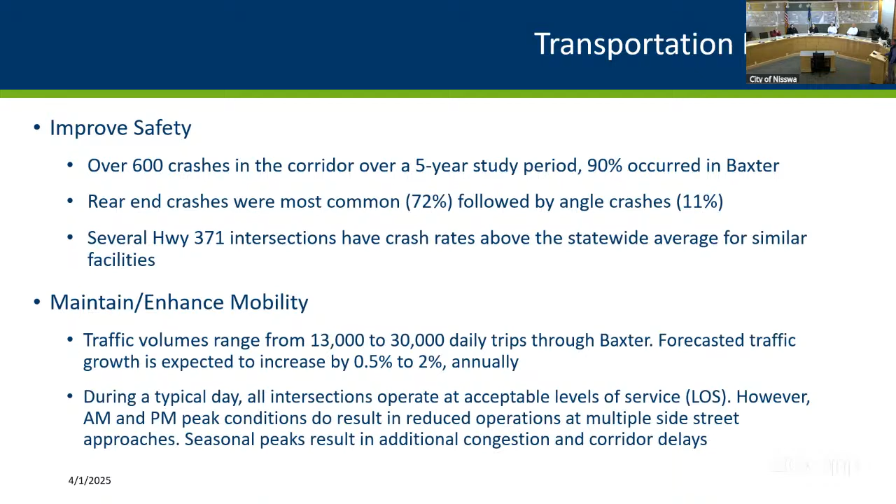But we wanted to make sure that anything that gets looked at for improvements keeps mobility as a primary need out there as well, that we don't want to sacrifice our mobility just to make all the safety improvements. So we're keeping those equally in our thoughts to make sure that we have both a safe and an efficient corridor. The next slide.

Some of our engagement to date: again, I mentioned we had three phases. We're in the final phase, and I do believe those updates to the website are occurring right now.

The goal was to have them done basically before the start of April, and we're right there now. So if it's not out there, it's going to be out there in the next day or 2. And then we're doing our final kind of workshops with all of our project partners. And so we previously met with Baxter a couple of weeks ago, as well as Crow Wing County met with their board, and then here tonight being able to share some of this information with you all.

And then wanted to share just a couple of what you're going to find out on that website. So these are 1-pagers that we've put together for kind of each of the locations, and these are even above and beyond what was submitted in the RAISE grant. The RAISE grant was really what we thought were kind of those more near-term immediate. I think there were 15 locations that were looked at and submitted for the RAISE grant.

We actually have more around 18 to 20 true locations, and one of those being here in Nisswa out at 13 and 77. We have an option there. But we weren't putting that forward in the RAISE grant at this time, just because there was still some question about what that concept looked like, and we'll share that with you all in a little bit. But this is just an example of what the public will find when you visit the website.

It kind of provides the study background, what the existing condition is at the certain location, and then what the proposed improvement is. And it's really tough when we're talking about pretty technical information here and trying to provide it in a manner that really the public can consume it.

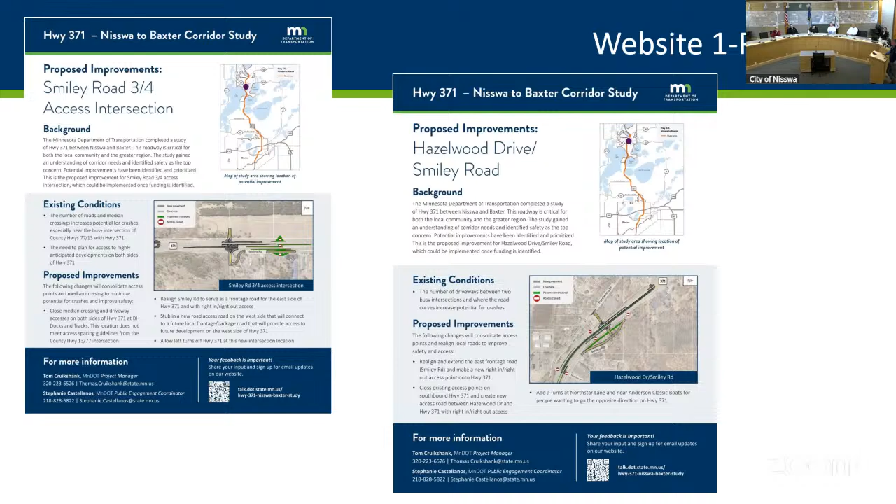So, the little bit of text here and the little graphic, we hope that people really dive in and look at some of the other resources that are out there too, because it's hard to tell a story of 18 months of what we've looked at in some of these one pagers, but there's more information on the website as well. So next one.

So what we did look at throughout the process, and again, we've shared some of these with you, and we've had the roll plot out and all that, but we looked at alternative intersection controls, looked at J-turns or reduced conflict intersections. We looked at some left in, left out or green T intersections, and also some grade separation at a few locations. In addition, we looked at areas where we might be able to do some further access management.

We know that wherever we have access points on the corridor, they are points of conflict. And the fewer points of conflict we have, the safer corridor we can have. Now, we recognize that we can't go and eliminate all access. That just wouldn't be reasonable or feasible to maintain land use and let people get to their destinations throughout the entire corridor.

And then we also looked at a number of locations where the existing or future frontage backage road system could be enhanced to provide, again, better access for the public. So maybe if you only have a short trip that you're moving north and south, maybe you don't even have to get on Highway 371.

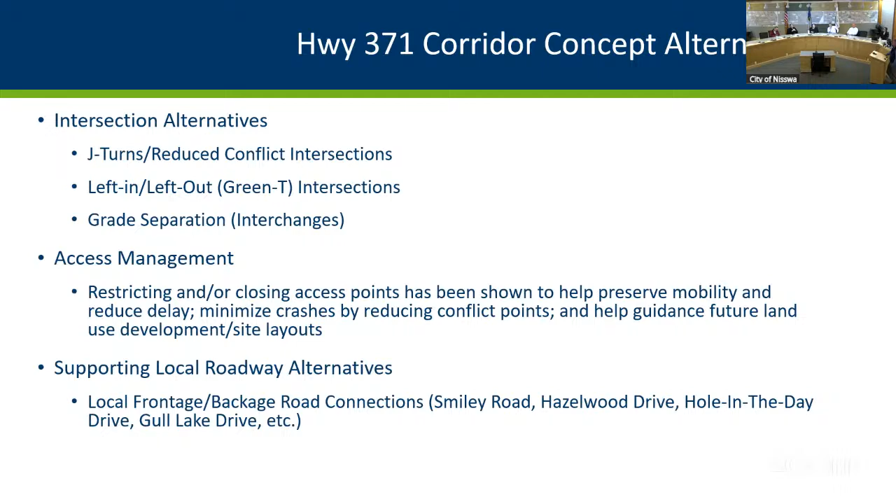Maybe there's a local supporting roadway that can satisfy your trip, and making some of those connections can really create that opportunity to provide, again, a safer option on 371 for those people that are more regionally traveling, and a safer option for those on a local system that are trying to just get to local locations.

And so we did mention that RCUTs or J-turns are something that we are looking at. I know that it's not new to this area. There have been 4 that have been recently constructed along the corridor within the Brainerd International Raceway location. But some people say, what is this new J-turn?

And while they are relatively new, they have been around for some years, and there are quite a number of them throughout the state that are being implemented. And so this was a resource pulled off of MnDOT's site, and I'm sure this is actually dated now. They're well over, I think, 75, and I think in another year or two, that number is going to more than double.

So this is a traffic control and safety improvement tool that they're finding to be highly effective. And so it's being implemented more often. And I think as the public sees them and gets acquainted with them, there's going to be less concern or resistance to them.

I kind of equate it to roundabouts. If you go back 12, 15 years ago, and people thought of roundabouts, the vast majority of people opposed them. They really just said, oh, I hate those things. They're so confusing. They're worse than anything.

And nowadays we continually have people say, why aren't you putting in a roundabout? Why are you putting in more stop signs? Or why are you putting in more signals? I hate sitting at a red light when there's no one on the cross street. If I could just go through it with a roundabout, I'd be happy.

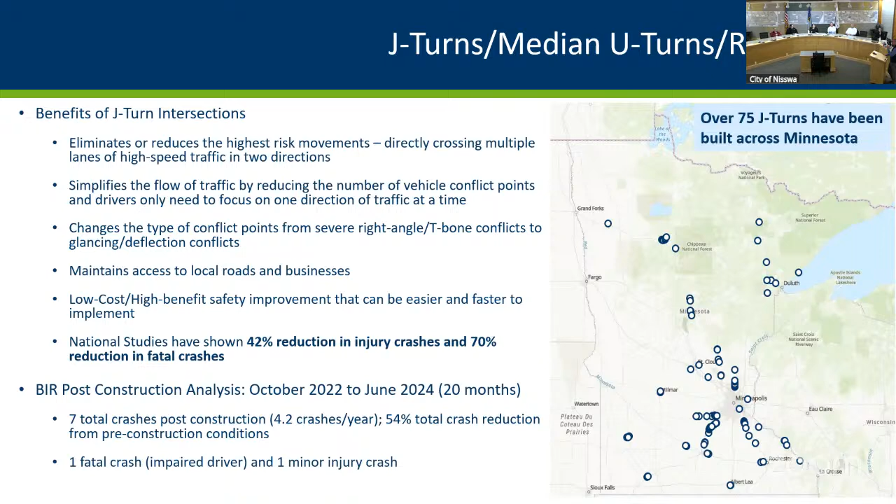So we wanted to provide a little bit of information on signalized J-turns as well. And so this is something that in Minnesota is relatively even more new. There's only one signalized J-turn in the state right now, up on Highway 65 in Anoka County. It's a location where they at one point looked at building an interchange, but due to some site constraints, cost constraints and everything else, they put in a signalized J-turn.

And originally it had some challenges, it had some tweaks that had to be made. They had free right turns where you could turn on red. If you were on the side street, you could make a right turn on red. They've had to eliminate that because really the sight line was not ideal for the high speed section that it is located in. They had trips on Highway 65 that are traveling at very high rates of speed.

I think in that location it's signed at least 60 or 65. And so they've actually changed it over to a no right turn on red. And they feel like they've really improved the safety even more.

And as Tom alluded to, it's really the intent of all J-turn or reduced conflict intersections to remove those most serious conflicts, those right angle crashes where someone's trying to make a left turn or a straight across movement, and they're exposing themselves to a right angle crash where that driver gets T-boned.

And so when you create intersections like we're talking about here with J-turns or signalized J-turns, those movements become more of a deflecting or a glancing type of blow, because someone is taking a right turn, and if they were to get hit, it's not that straight on right angle.

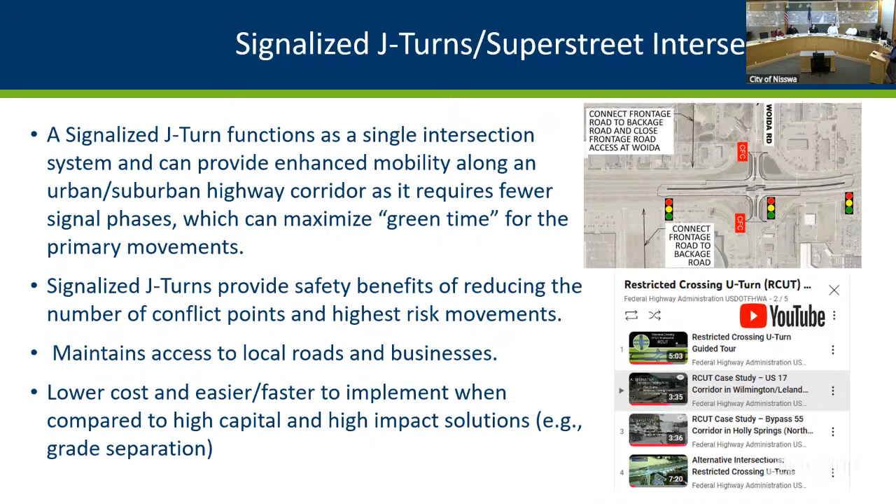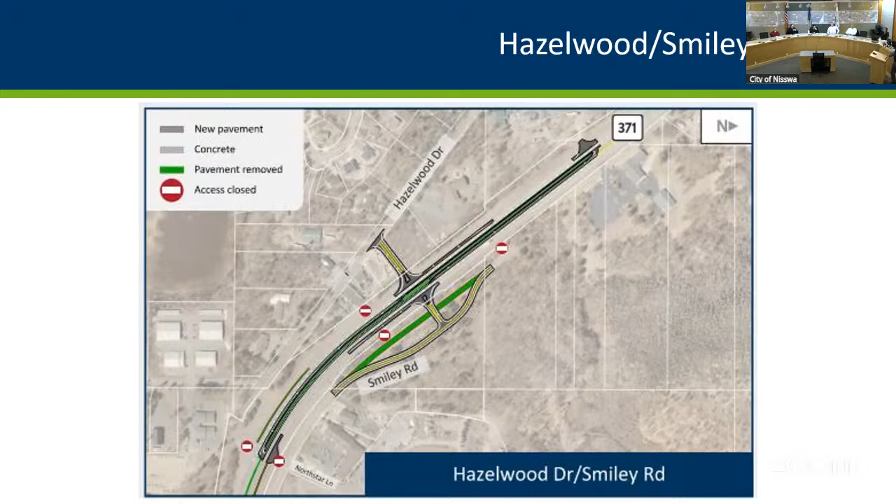The next one is one that was not included in our RAISE grant. We see this as a location we're monitoring a little bit more, given the safety conditions we've more recently experienced. We didn't see it in the previous 10 years of our safety analysis, but this location just recently has had those 2 really unfortunate crashes with fatalities. So while there have been some incidents, when we started the study we weren't looking at this as needing major improvements, but this is an option here to put in a signalized J-turn at this location.

What really gets difficult is the frontage roads, mainly on the east side of where they're located. Is there an opportunity to remove them where they're at today, maybe shift them further to the east to get better separation from the main line? Because that's a problem today where sometimes those queues back up and really restrict people from using that continuous frontage road. And so that would be an option, to maybe improve some of the local system with this, but really we would put in a J-turn here.

We would allow left turns at this location. There are different designs even within J-turns and signalized J-turns of what kind of access you do allow. Sometimes they're just right in, right out. In areas where you have a much higher left turning movement throughout many hours of the day, you can look at putting in the full left turns.

And like the one I described in Anoka County on Highway 65, we call it a 3/4 J-turn, where you can make the left turns off the highway. But if you're on the side street, you cannot make a left turn on or cross straight over. That is where you have to do the median U-turns. So this one, you can't go straight across? You cannot go straight across, no.

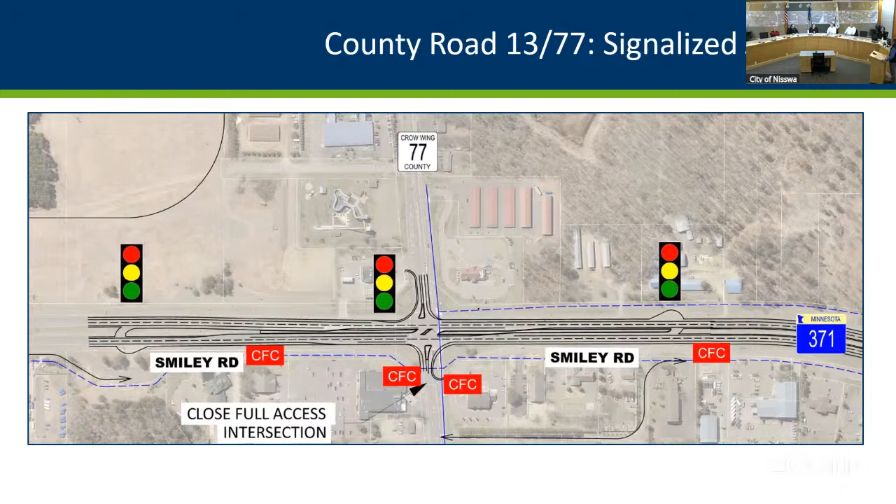Other questions on this one? We've got a few more we want to share, but other questions here? All right, we'll continue a little south.

And so we've recommended that we shift that access location a little bit further to the south. This extends Smiley on the east side, and then would tie into some type of a city street on the west side that would accommodate future development. This again would be designed as an unsignalized 3/4 access type of intersection. Understand that there's been some development interest in this location. We did have this in the RAISE grant to be more of a short-term type of improvement. But that might even need to happen sooner, depending on what happens with development in this area.

And so we've been talking with staff a lot that, hey, when you get someone walking in the door and they start showing site plans, bring MnDOT into that conversation early, because this isn't just something that we can go out and get developed in a couple of months, which some of those developments want and expect to happen. So the sooner that everyone can see a concept, understand a concept, and build that into their site plans. That's really what some of these improvements are being designed for, to advise future development in the area. Yeah.

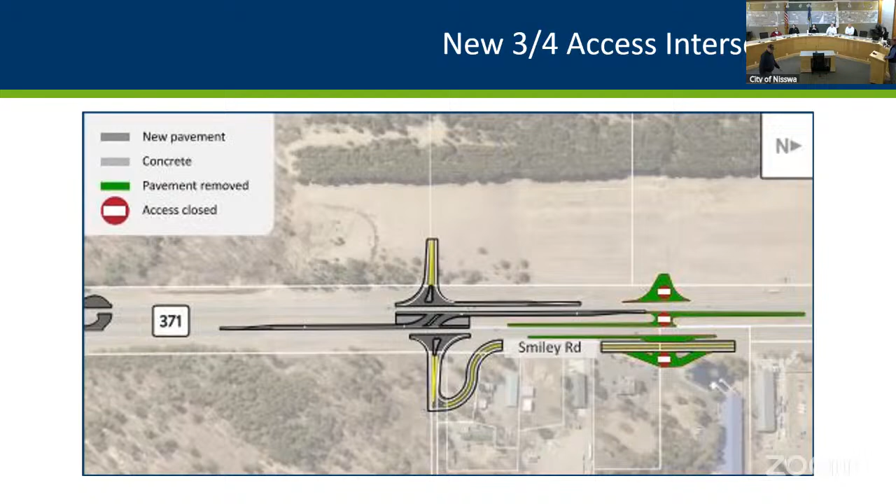This is where you have utilities planned to go underneath? I know that. Well, that was the original plan, but weren't they talking about leaving the lift station up in front of the brewery and stuff now, punching across there? That was, yeah. It is what it is. It is what it is.

This was another one that was included in the RAISE grant, and again, no immediate need at this location. This was not a location where we had a lot of safety issues. But it's an opportunity that if funding were available, this would be one that MnDOT would look to implement to improve safety. But if funding were not available, this is not going to be your high priority location for improvements in the more near term. That would probably get pushed a little bit.

This concept could be modified. Yeah, any of the J-turns could be modified to allow those left turns like the 3/4. It's really based on what is the left turning need. Again, we know the church probably has a peak, right? There's probably a time when there's 100 cars or 200 cars or whatever the number might be in a shorter time period, but that's probably not sustained throughout every day of the week and several hours of every day.

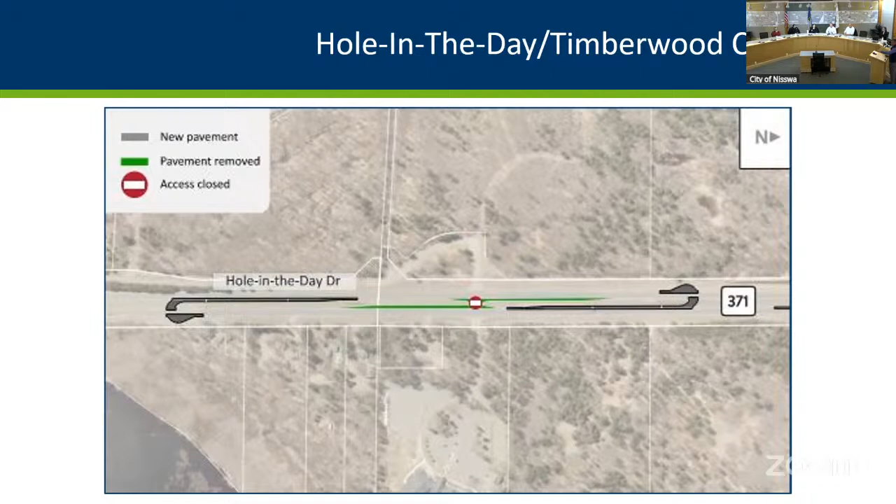I've been warned, I got like 5 minutes because you guys have a planning commission. So I got a couple more.

The other option we have in the next slide is what I referred to earlier when we said that we had a left in, left out, advance one. Oh, yeah, I did get it working here. So this is a left in, left out, or a green T type of intersection where, again, if you're say southbound and you wanted to turn onto Nashway, there would be a designated left turn lane. And so you could take a left in. This actually allows a left out as well.

And the reason why we are considering that here is just, again, the distance people would have had to travel with the J-turn. We're not saying that one's not still on the table, but this is just an alternative option for that. And by eliminating that west leg, it really eliminates the worst kind of condition that we've had out here with people trying to cross over in this location. So we do have two options that are moving forward at this location.

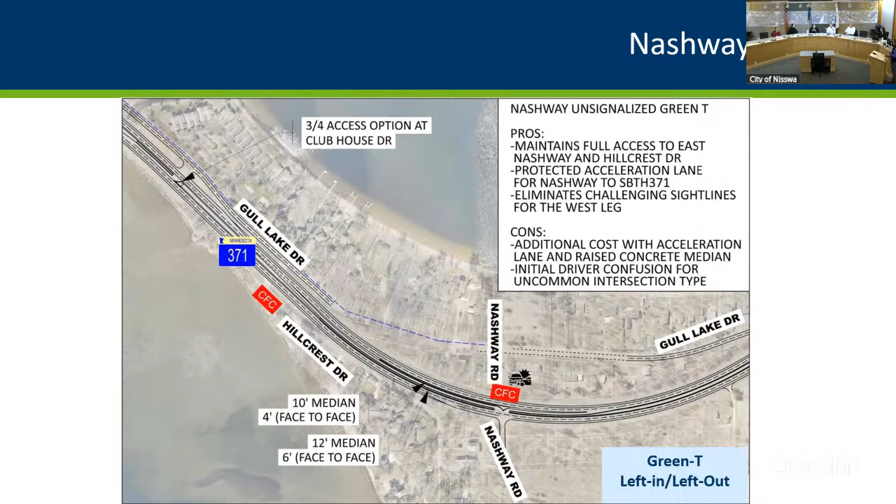Are you all still intending to have the proposed paving and creation of the service drive alongside 371 in that narrow spot on Gull Lake and Hole in the Day Lake? So that's back to this one. I think that's kind of our long-term goal, to have that continuous western frontage road where Hole in the Day would connect to Gull Lake Drive. That requires a much bigger investment because it actually includes moving the lanes on 371 as well a little bit to the east.

And we know that that is challenging in itself. There's some environmental constraints out there with the wetlands and Hole in the Day Lake and all of that. You know, again, we're identifying that as kind of that long range goal, and that in itself would be a fairly large investment. So again, that was not in the RAISE grant to do all that work. Sure.

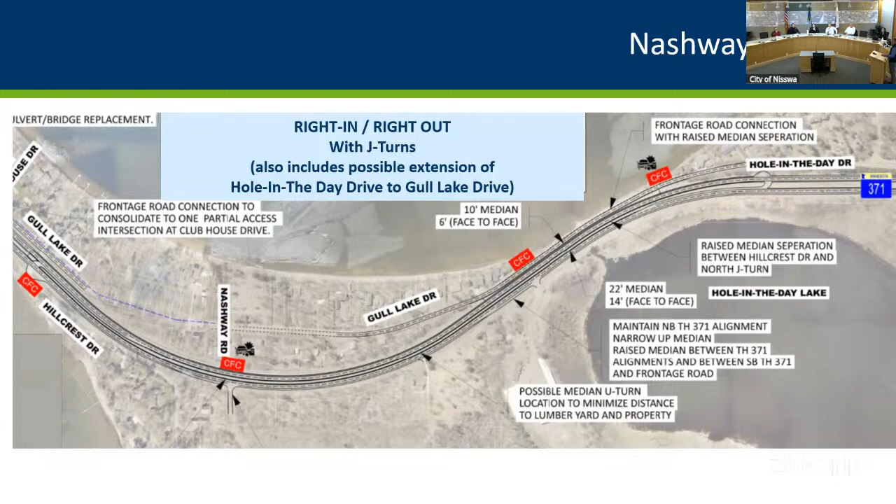And so here, again, we have a median U-turn for the southbound and the northbound direction. A slight difference on this one is, as you see on the northern end there, it's not only just a J-turn median U-turn, but it actually would be a left turn into the service road in that location. So that's kind of how we're treating many of these.

This again would be one that we would look at doing hopefully sooner than later. This is in our more near-term improvements that, if the grant funding were to come through, we would try to advance. And so that's the concepts. Again, we've got roughly 18 throughout the entire corridor, but these are the ones we wanted to just present to you all tonight.

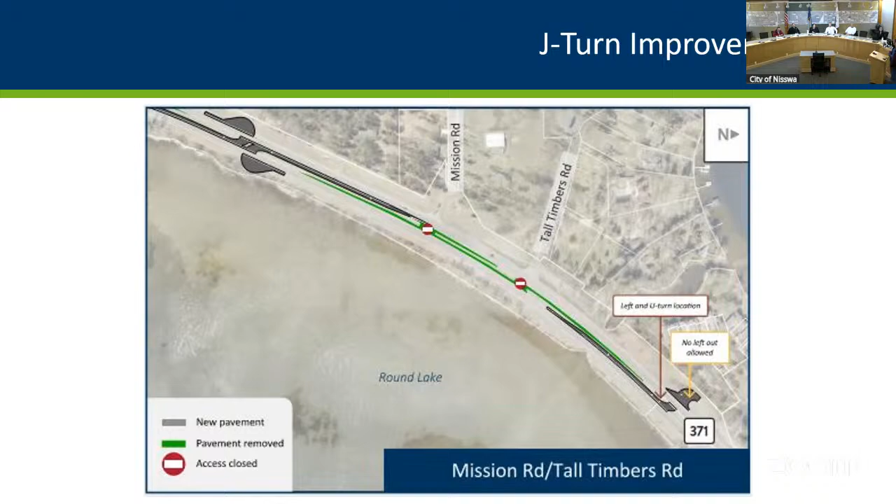Other questions? Feedback? What is the next step? Our next step is, again, we've been working with staff on developing our implementation plan. And so we've broken things down into near term, midterm, long term. And just generally those buckets are the near term being in the next 5 to 7, 8 years. Midterm would be somewhere 2035 or later.

And then long term, like we've got an interchange at Highland Scenic down on the very south end of our corridor that might be a 30+ year type of thing, because we just know that it's not needed today. It's not warranted. MnDOT's not going to go and look for $40 million in their program to build an interchange where it's really not needed.

So on the ones you went over tonight, I think there were 6. Which of those? Only the one at the county road at 77 and 13 was not in our RAISE grant. Now, we've taken those near-term ones and further broken them down. If grant funding doesn't become available, where would our priorities be? Right. And really in this area, it was the new intersection, because we know there's development pressure coming.

I keep turning this off, or is it? Shoot. Oh. The Smiley Road one? Or the- Yeah. I'm trying to go back. Oh.